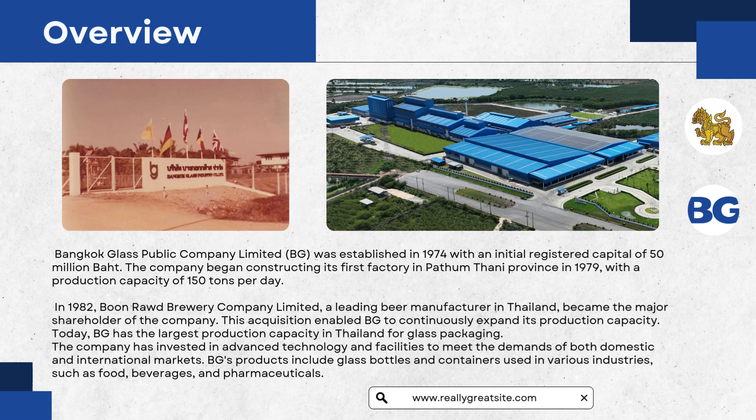Today, BG has the largest production capacity in Thailand for glass packaging. The company has invested in advanced technology and facilities to meet the demands of both domestic and international markets. BG's products include glass bottles and containers used in various industries, such as food, beverages, and pharmaceuticals.

Now let's discuss the factory constraints concerning demand and supply. The first one is market saturation in glass packaging. The glass packaging market has approached its saturation, so Bangkok Glass Company decided to diversify into float glass products instead, which includes building materials and solar panels, to help mitigate the decline in demand.

Another one is the energy supply challenges. The Rayong plant faced natural gas shortages, so BG decided to construct a new 400 tons per day furnace in the Ratchaburi facility to ensure a stable energy supply and to meet the demand for glass containers.

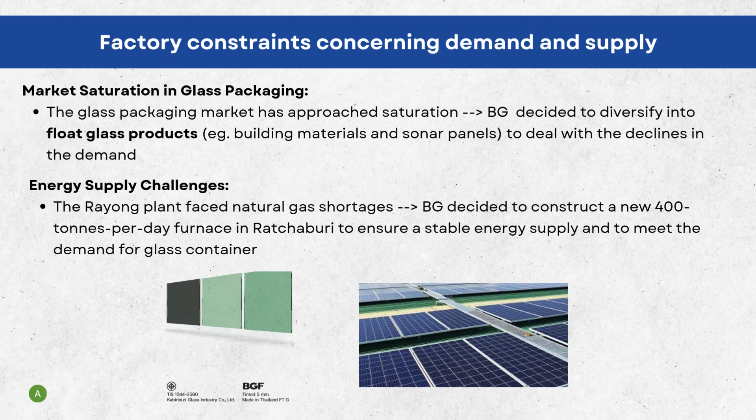Next up is the problems that have already been solved and the current challenges BG is facing. The first one is market saturation in glass packaging. BG's Pathum Thani plant achieved a 10% reduction in greenhouse gas emissions compared to other industry averages. They achieved this by maximizing cullet usage, which is basically recycling broken glass pieces, and optimizing overall energy consumption. The company aims to further reduce emissions by 1 to 2% annually in the future.

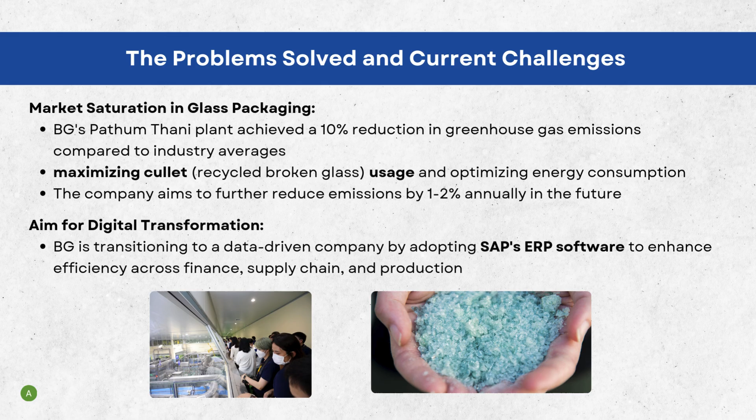They also aim for digital transformation. They are currently trying to transition into a data-driven company by adopting SAP's ERP software to help enhance efficiency across all sectors, such as finance, supply chain, and production.

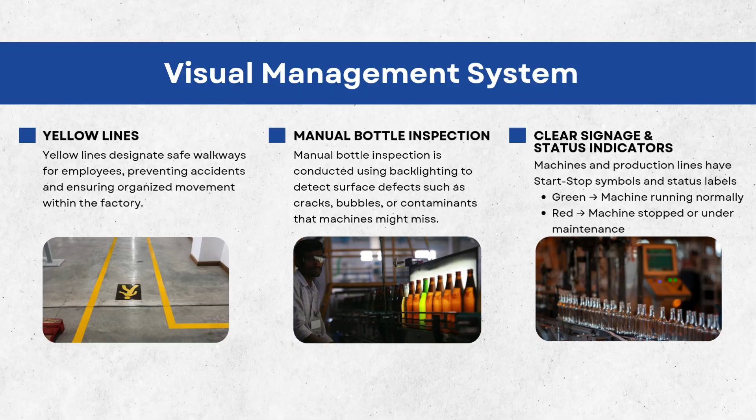Further, the production scheduling system begins with raw material inspection, where recycled glass is sorted and cleaned to remove contaminants like stone and aluminum. We also check the silica, calcium levels, and grain size to ensure quality.

Next is the manufacturing process. First, raw materials are mixed in the batch house and transported via conveyor belts into the furnace. The furnace operates at temperatures up to 1400 Celsius, using a regenerative system for energy efficiency with natural gas as the primary fuel.

In the forming process, molten glass flows through the spout zone and is cut by shears. The blank side forms the bottle's neck, while the parison mold shapes the body. The bottle is then finalized through the inverter and undergoes annealing to relieve internal stress. After passing quality control, the bottles are ready for distribution. This process ensures high quality, sustainable glass production.

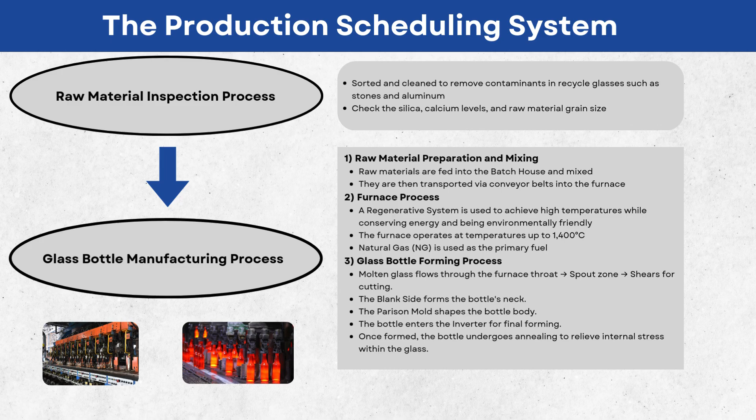Next, I will let you know about the space utilization. Let's take a look at how space is utilized within our factory. The facility is divided into three key areas: glass forming, quality control, and packing and storage.

Starting with glass forming, this area houses 3 furnaces and 9 production lines, with each line operated by 2 personnel to ensure efficient manufacturing. Next, we have quality control, or QC, where advanced inspection machines like Evolution 12, Evo 5, Metal Hacker, and M1 ensure product quality. Manual inspections are also conducted, and a physical lab is available for volume testing to maintain high standards.

Finally, in packing and storage, inventory stock is maintained for 1 to 2 months, amounting to approximately 100,000 tons. During periods of low demand, additional warehouse space is rented to accommodate excess stock. This structured space utilization ensures smooth operations, high quality production, and efficient storage management.

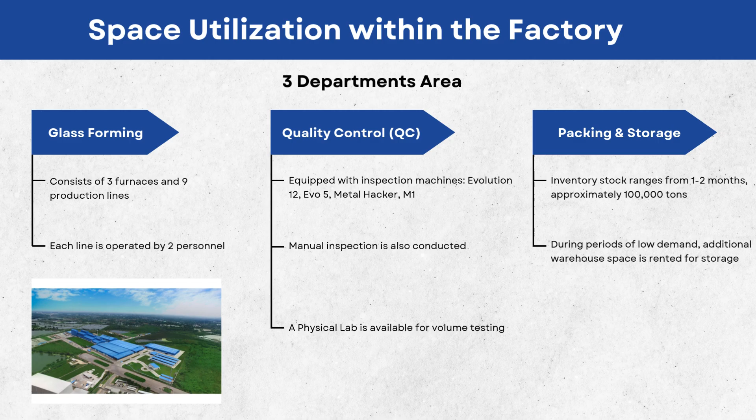Teamwork and motivation drive success. To foster collaboration and engagement, we introduce 4 key initiatives. First, bonding activities: various events throughout the year strengthen relationships between employees and the organization.

Second, seminars and training, designed to encourage passion in work and professional growth, these programs enhance skills and motivation. Third, departmental insight sessions that improve collaboration and ensure smooth workflows between departments, promoting efficiency.

The last one is Happy My Day, or Tao Lom Jai. It is a welfare program offering individual counseling by psychologists to support employees' mental well-being. Through this initiative, we can create a positive work environment where teamwork, motivation, and growth thrive.

The machinery in our facility plays a critical role in production, and keeping it in top condition is a top priority. Starting with the furnace, it operates continuously and never shuts down, with a lifespan of 15 years. It reaches extreme temperatures of 1400 degrees Celsius and runs primarily on natural gas, or NG. We operate 2 furnaces across 7 production lines, producing 165 bottles per minute.

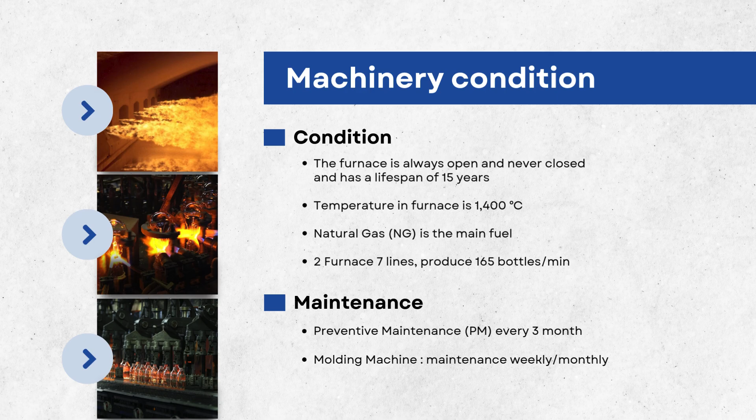At this company, we prioritize machinery health and address any issue immediately to prevent production delays. By maintaining strict maintenance routines and safeguarding our equipment from potential risk, we ensure smooth operations and consistent output.

Bangkok Glass uses a visual management system to make the factory safer, more organized, and more efficient. This system has 3 main parts. Yellow lines mark safe walkways to keep workers away from dangerous areas. Manual bottle inspection: bright lights help workers see cracks, bubbles, or dirt in the bottle that machines might miss.

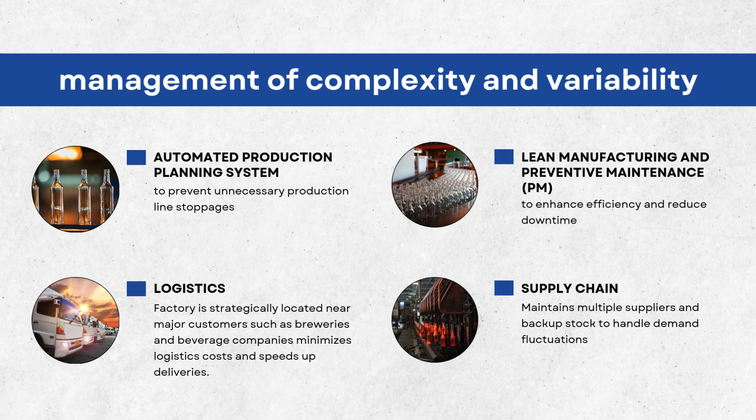Next up, let's discuss the assessment of quality management related to standards and systems. BG has obtained several and numerous key certifications that underscore its dedication to quality, environmental responsibility, and occupational health and safety standards. These are just a few examples.

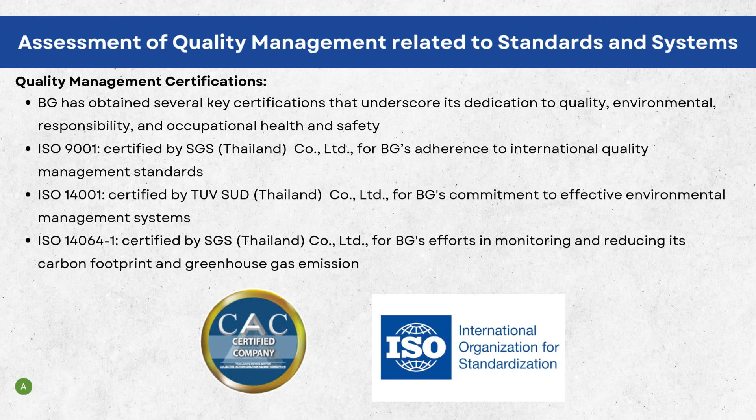ISO 9001 is certified by SGS Company Thailand for BG's adherence to international quality management standards. Furthermore, BG has been approved by the Thai Industrial Standards, or TIS.

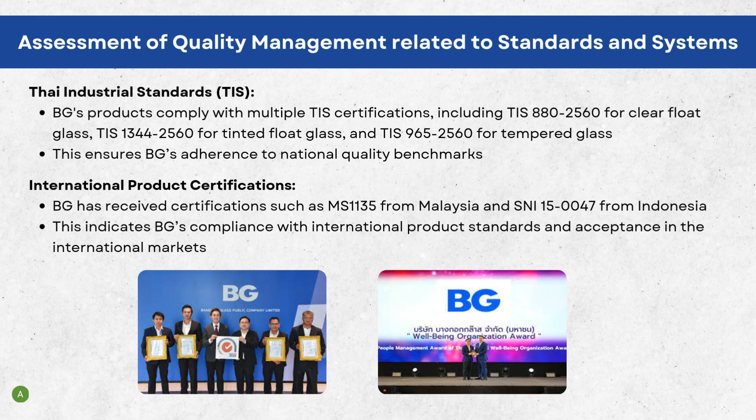BG's products comply with multiple TIS certifications, including TIS 880 in the year 2560 BE for clear float glass, TIS 1344 in the year 2560 BE for tinted float glass, and TIS 965 in the year 2560 BE for tempered glass. These awards and certifications ensure that BG adheres to national quality standards.

For the raw materials, the key raw materials for glass production must have a fine grain size to ensure efficiency in the manufacturing process. First is silica sand, the primary component of glass. Next is soda ash, to lower the melting temperature and reduce energy consumption.

Next is dolomite, to enhance the glass's durability and strength. Next is limestone, to improve the chemical stability of the glass. The last is recycled cullet, or glass scrap, sourced from waste management companies. It must be thoroughly cleaned and sorted to remove contaminants such as aluminum, stones, and ceramics before being reused.

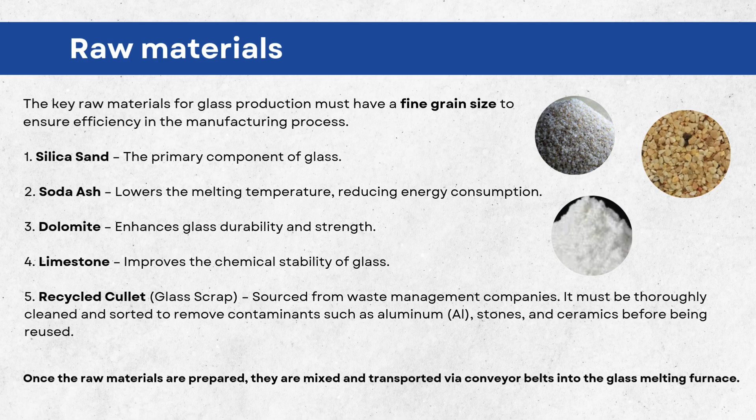Once the raw materials are prepared, they are mixed and transported via conveyor belts into the glass melting furnace. For inventory management, the glass melting furnace operates continuously once started, with a lifespan of approximately 15 years. It is designed based on market demand forecasts, spanning 15 years to align with industry trends.

For stock management, the factory maintains a stock of raw materials for 1 to 2 months, approximately 100,000 tons. If glass demand is low, excess production is stored in external warehouses to avoid shutting down the furnace, as turning it off would incur high costs.